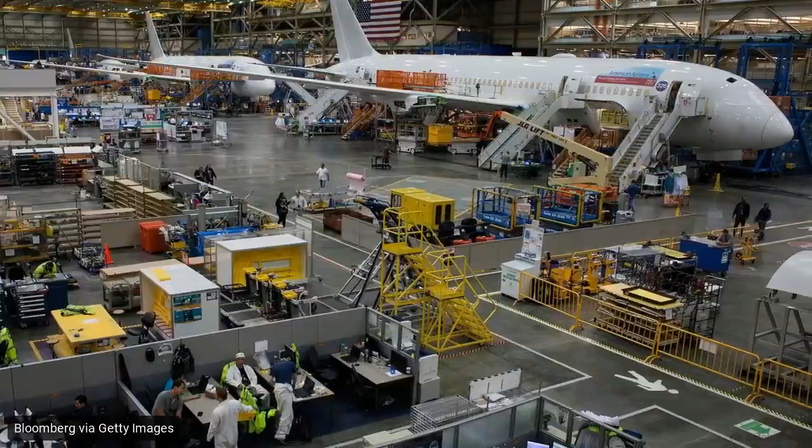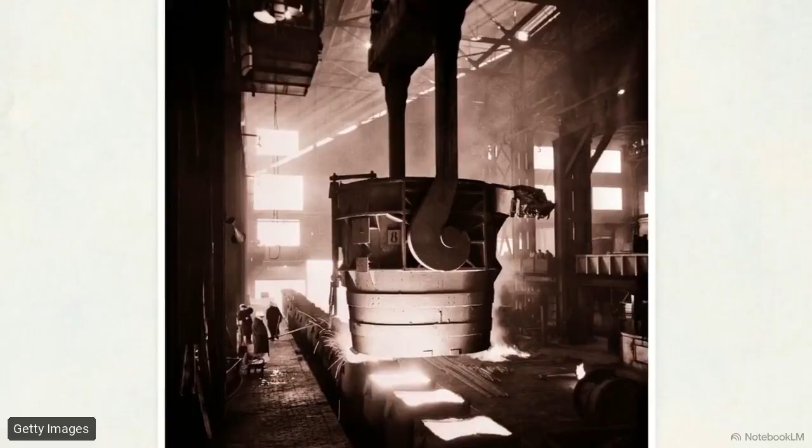Every engineer designing a commercial jet or an electric vehicle faces the exact same physical constraint. They need maximum structural strength to keep passengers safe, but they have a strict weight limit to keep the machine moving efficiently. For decades, you had to pick one. Solid metals provide immense strength, but carry unbearable mass. If you thin those metals out to cut the weight, they become fragile and buckle easily under pressure.

This 3D cross-section shows the architecture used to solve that problem. It is a structure known as a sandwich composite, and it relies on separating the material into 3 distinct layers, 2 thin outer face sheets and 1 thick central core. Each layer has a specific job.

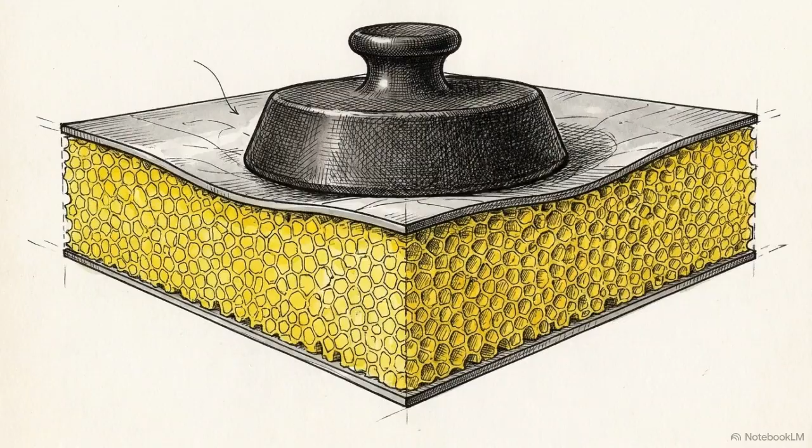The thin, stiff outer skins, often made of carbon fiber, resist bending and stretching. In the middle, a thick, low-density PVC foam core acts as a structural spacer that gives the panel its depth. These materials are intentionally balanced, so they share the physical burden. Because they are bonded together, the skins and the core distribute the stress, ensuring neither component reaches its breaking point before the other.

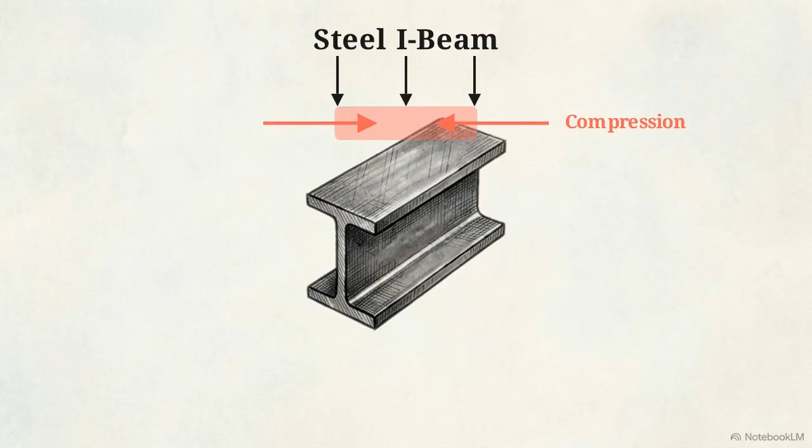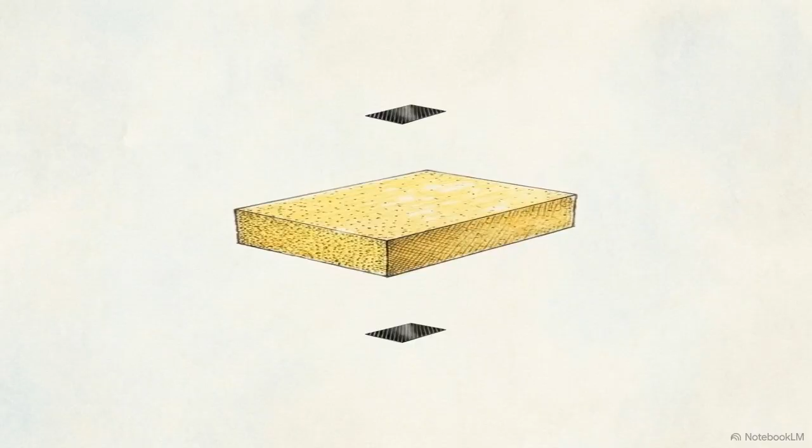To see how they share that load, look at a traditional steel I-beam. When a downward load is applied, the top flange compresses, the bottom flange stretches in tension, and the vertical web absorbs the shear force. A sandwich panel is essentially an infinite I-beam. By expanding that vertical web outward in all directions to form a continuous core, and stretching the flanges into skins, you create a structure that can handle loads across an entire 2-dimensional surface.

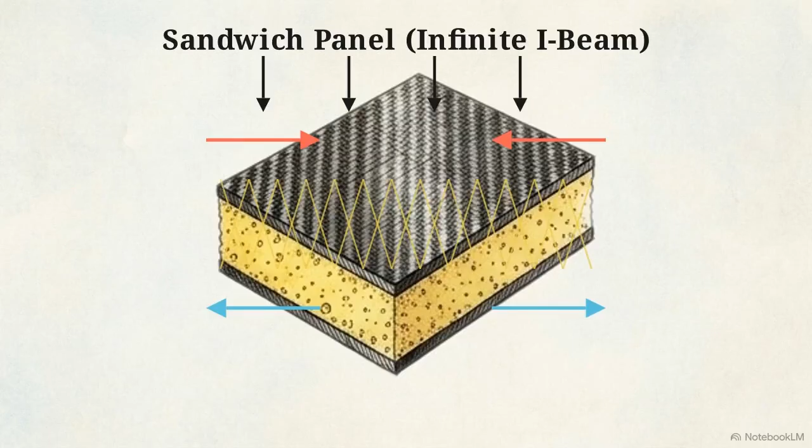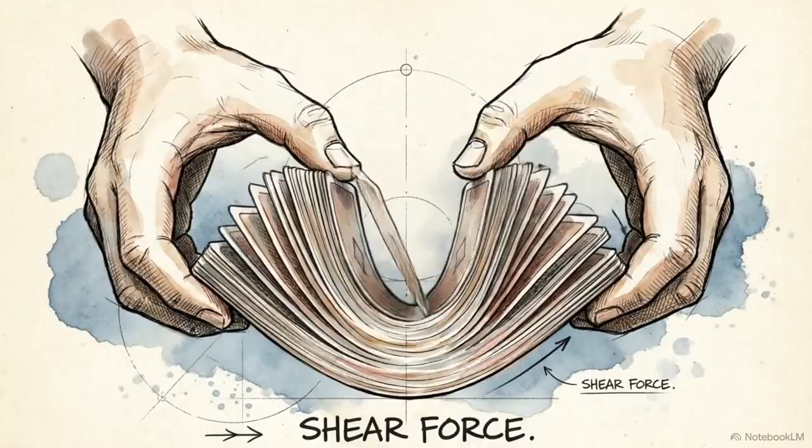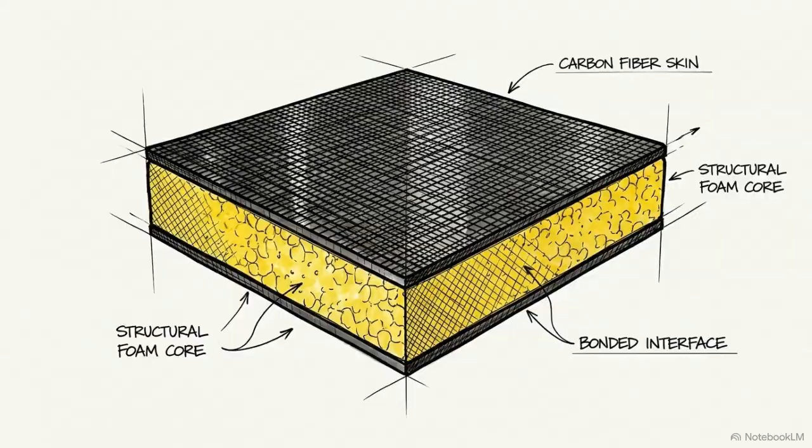Because the PVC foam is rigid, it eats up those shear forces in every direction. No matter where the force hits the panel, the core works to keep the 2 skins perfectly separated and stable along the neutral axis. If you bend a thick stack of playing cards, the unglued layers slide freely past each other because there's nothing to resist shear force. But if you glue the layers together, the core becomes rigid, forcing the top skin to compress and the bottom to stretch. By pairing skins that absorb tension with a core that neutralizes shear, engineers can generate a structure with immense bending stiffness while maintaining a very low overall mass.

Getting those layers to function as one requires a precise fabrication process. If you place a dry PVC core onto a dry or partially wet sheet of fiberglass, the layers will peel apart and delaminate the moment they are put under a load. To prevent that failure, fabricators use mechanical force to drive liquid epoxy resin deep into the weave of the fiberglass. You have to use a roller or a squeegee to ensure the resin fully saturates every individual fiber.

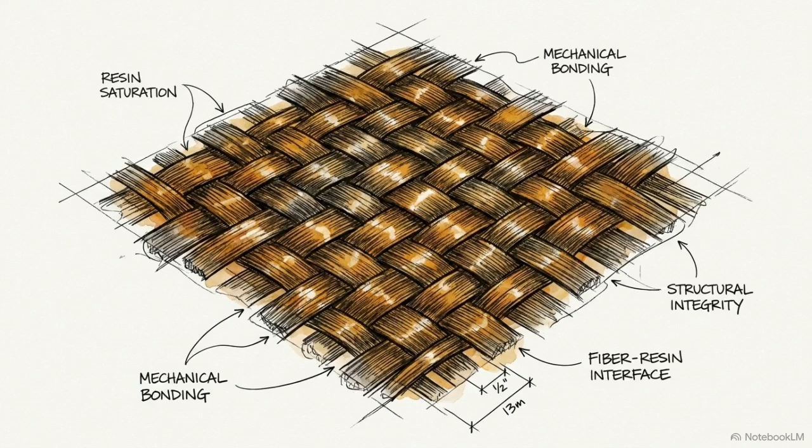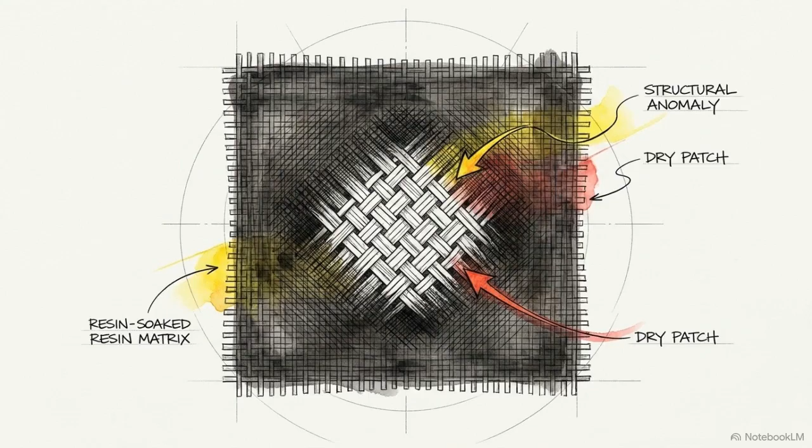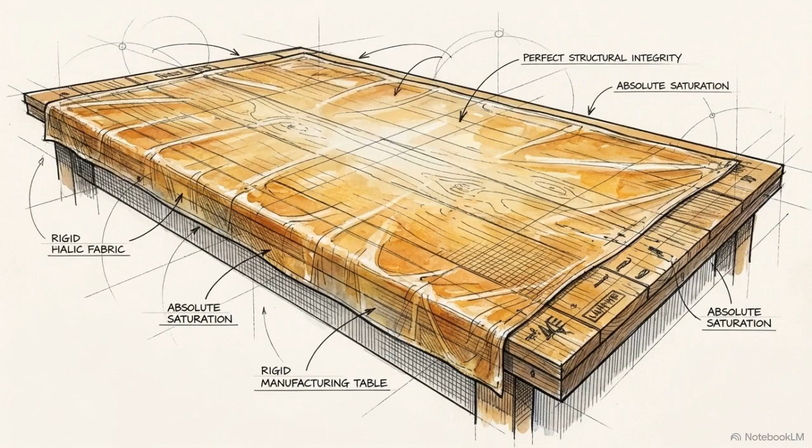You can verify this saturation with a color shift. As the resin penetrates the weave, the fabric transitions from an opaque white to a completely translucent state. Any remaining chalky white patches are dry spots. These are critical weak points that will fail under stress and destroy the panel's tensile strength. Achieving 100% translucency during this phase is what dictates the maximum structural integrity of the entire lower half of the finished composite. Once the bottom skin is wet, you prepare the central spacer.

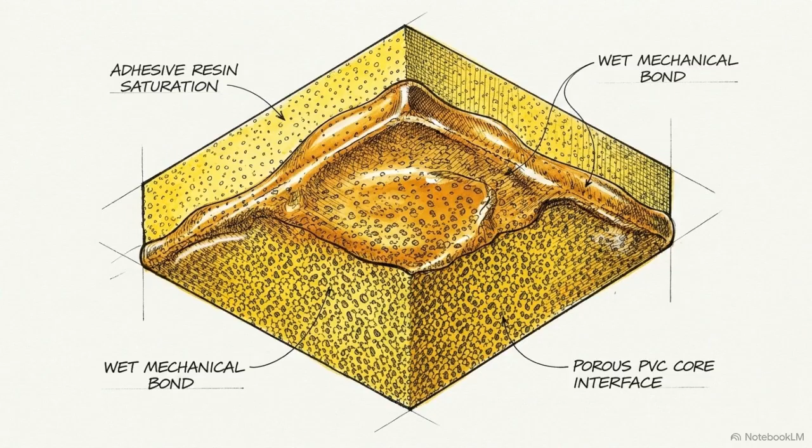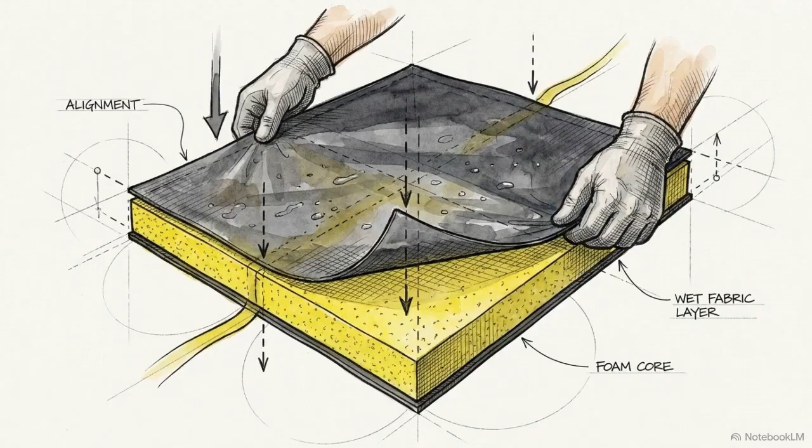Coating the bottom of the PVC foam core with adhesive resin fills the open cells on its surface, readying it for bonding. The coated foam is dropped directly onto the still wet bottom skin. This wet-on-wet contact allows the 2 layers to chemically fuse into a single unit. To close the structural envelope, a saturated top skin is aligned directly over the core. At this stage, the assembly is finished but vulnerable until it is compressed.

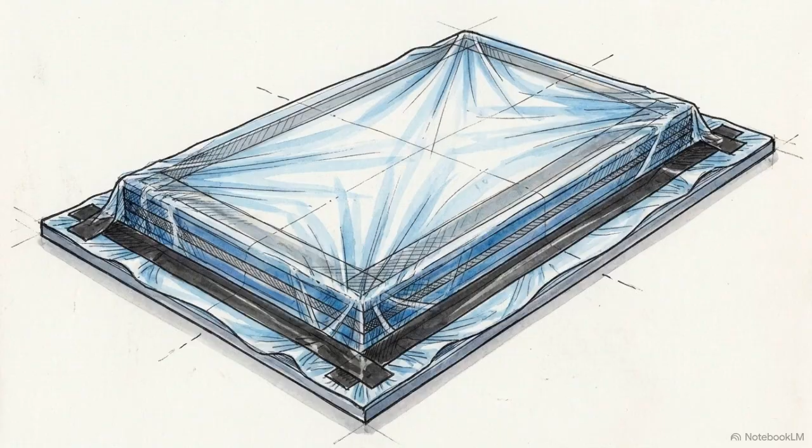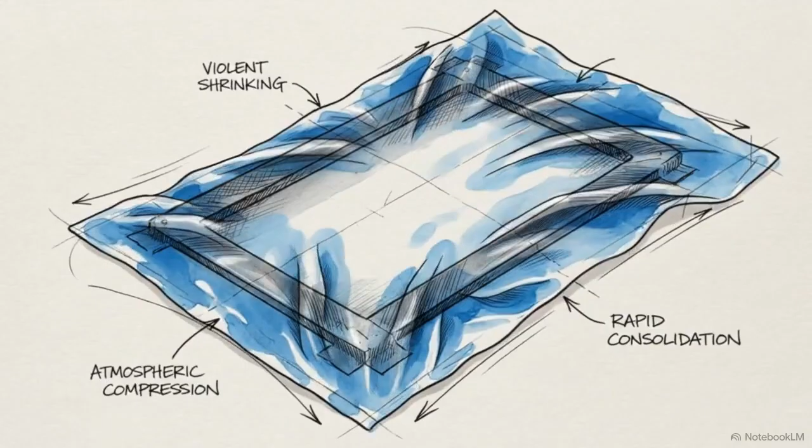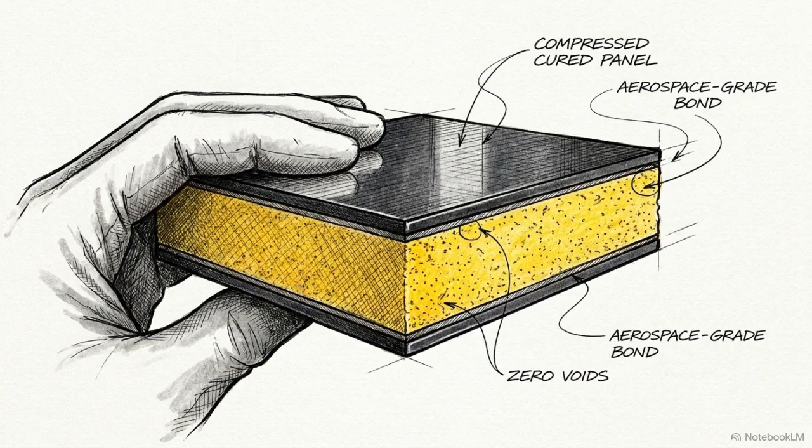Fabricators drape a vacuum bagging film over the entire panel and seal the perimeter with tacky tape. The tape must be perfectly flat. Even a microscopic wrinkle creates a leak that prevents the layers from bonding. Activating the vacuum pump triggers a massive shift in atmospheric pressure. As the air is evacuated, the plastic sheet rapidly shrinks and conforms tightly around the stack, compressing the layers together. This extreme atmospheric compression is what forcefully bonds the layers and squeezes out excess resin, creating a fully consolidated, aerospace-grade structure. Once the epoxy reaches its full chemical cure, the pump is turned off.

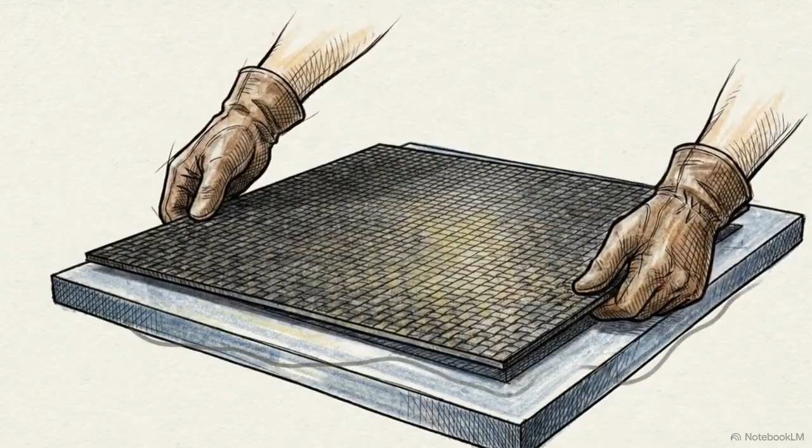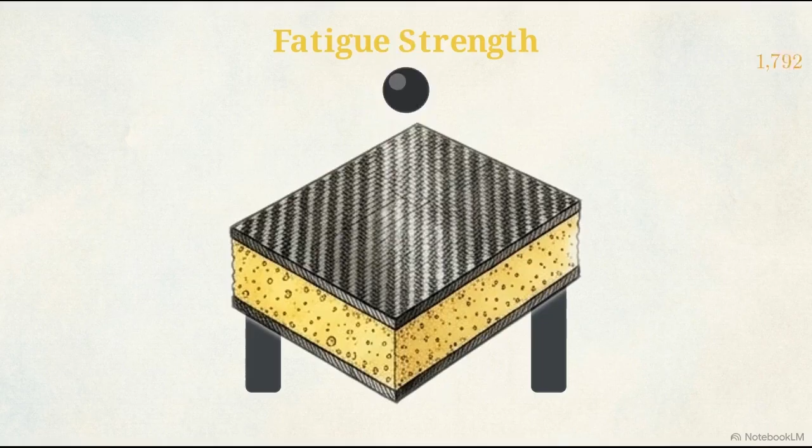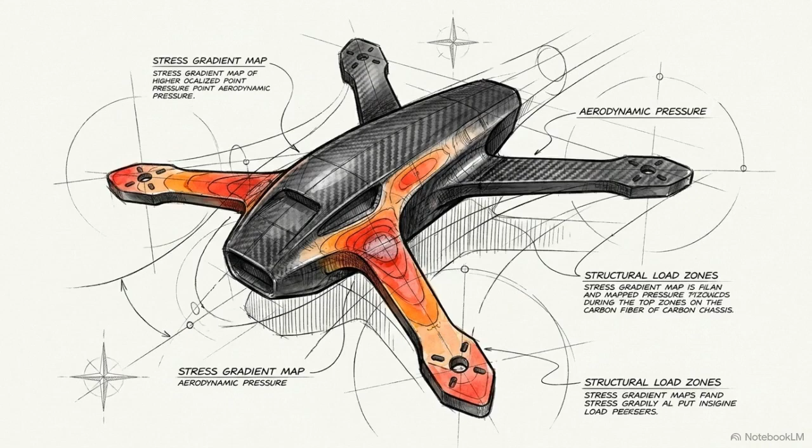The rigid panel can be popped off the mold easily, thanks to a release agent applied at the start of the process. What remains is a part with extreme flexural rigidity, high impact resistance, and the fatigue strength required to handle thousands of load cycles without failing. Engineers often choose these chemical foam cores because they are isotropic, meaning their strength is uniform in every direction. This provides a level of predictable stability that helps complex parts handle stress from unpredictable angles.

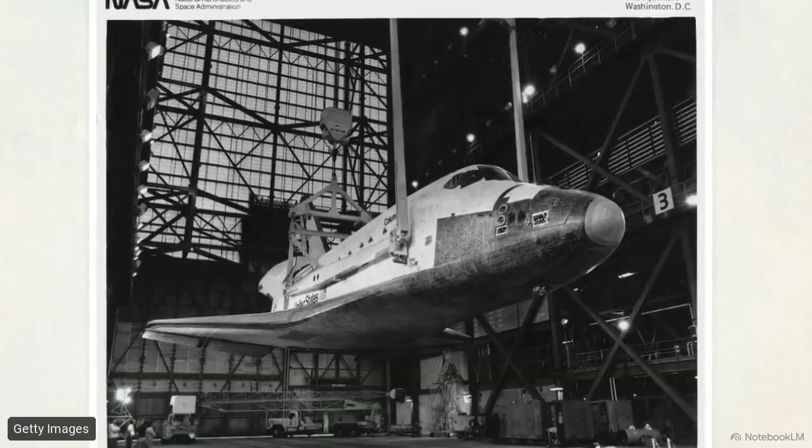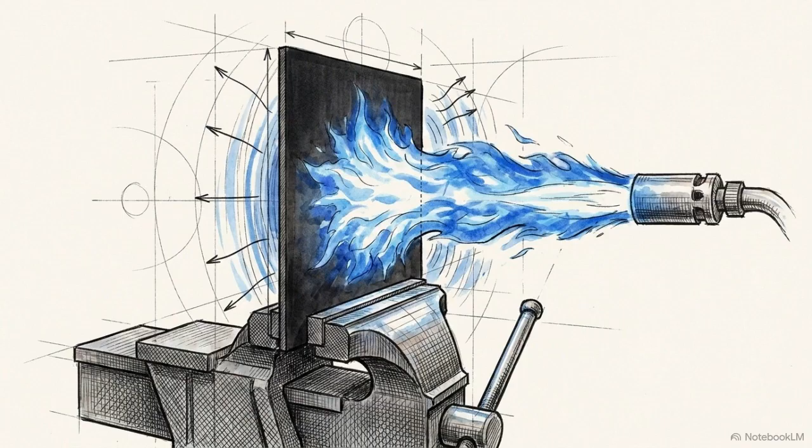These structures have their origins in high-stakes aerospace programs. For a vehicle like the Space Shuttle Columbia, cutting weight was a matter of survival and efficiency, as every extra pound required more fuel to reach orbit. The fabrication process turned simple fabrics and foams into high-performance materials capable of surviving the harshest physical demands on the planet.

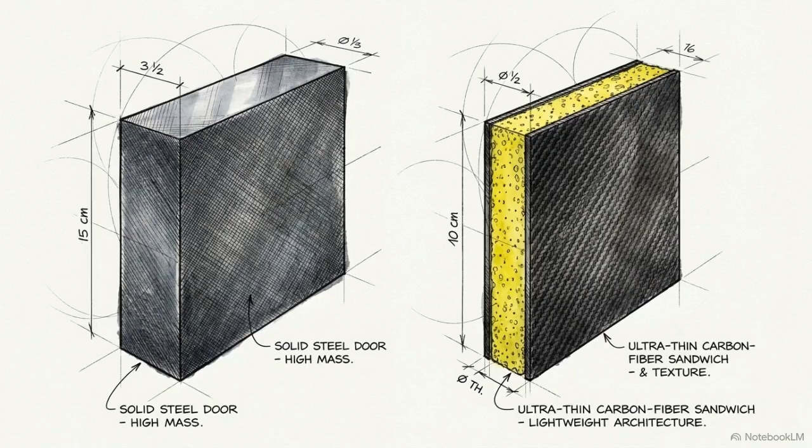This lightweight composite technology has moved out of aerospace programs and into mass-market automotive manufacturing. By reducing the vehicle's mass, they were able to improve its energy efficiency and battery range. Removing traditional heavy metal didn't mean sacrificing safety. Because the core is so efficient at absorbing shear, the chassis remains rigid and protective during an impact.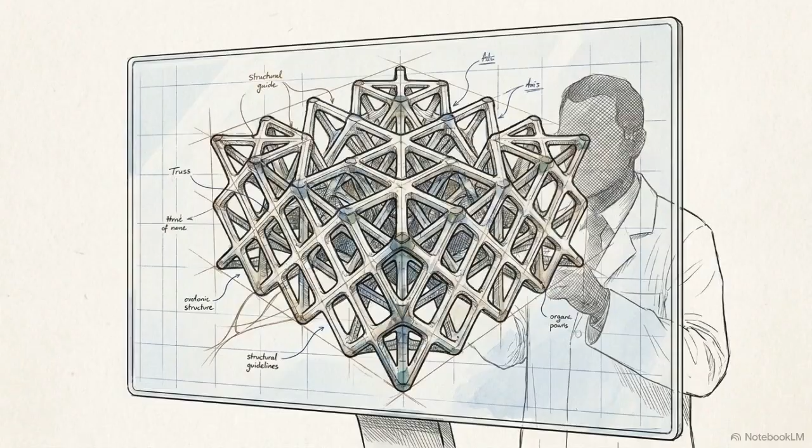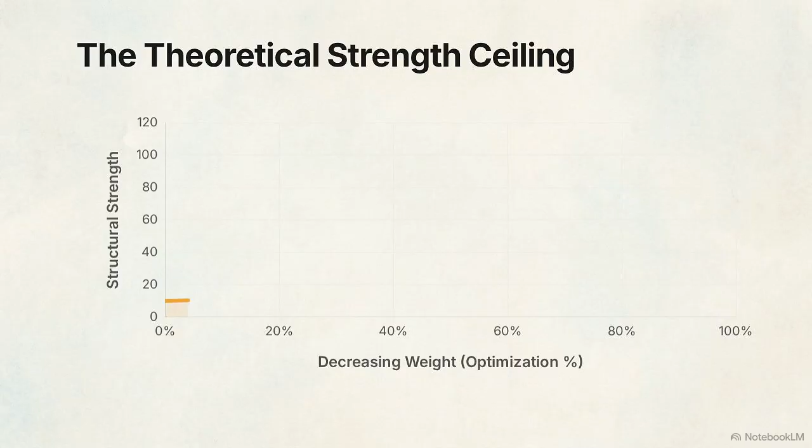Today, material science is pushing into the microscopic level. Engineers are developing synthetic core topologies and 3D printed lattices to see how much more weight can be stripped away. It leads to the ultimate structural paradox. What is the absolute theoretical limit of a material's strength-to-weight ratio before the core simply becomes too light and the structure fails from localized buckling?